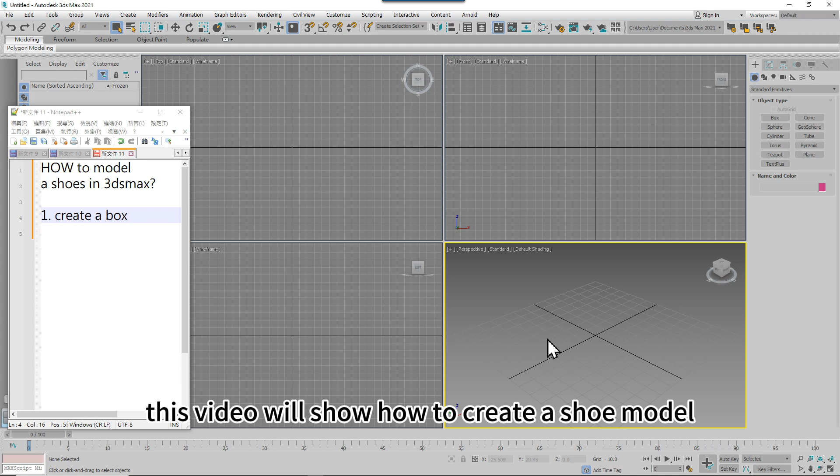This video will show how to create a shoe model in 3DSMAX.

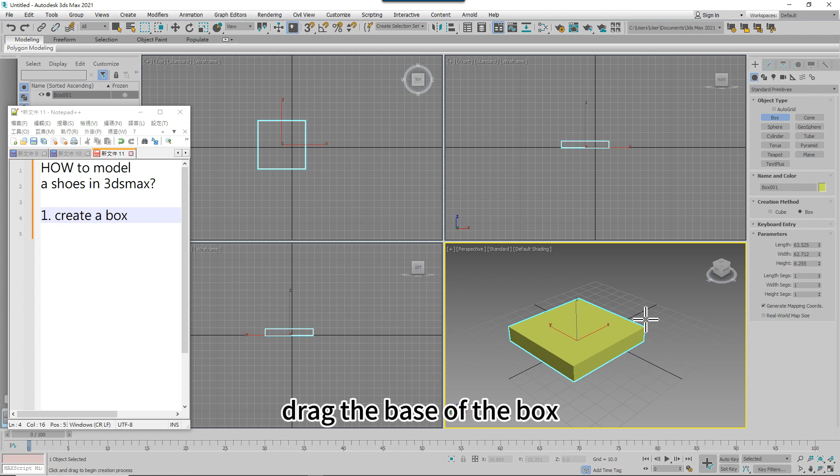Now we need to build a box first. Drag the base of the box, then move your mouse upward, then click to decide the height.

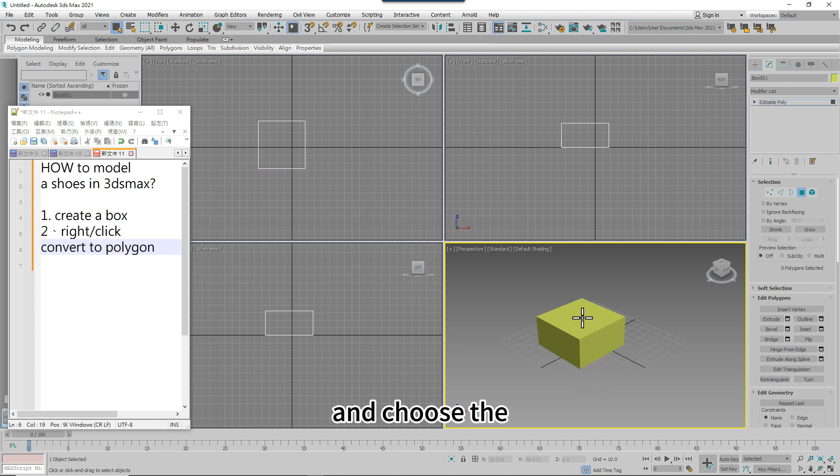Then right-click to choose Convert to Polygon Model. And then we can click the polygon button and choose the top face of the box. Right-click the extrude command, not the words, but the little box, so we can adjust the height by dragging the amount.

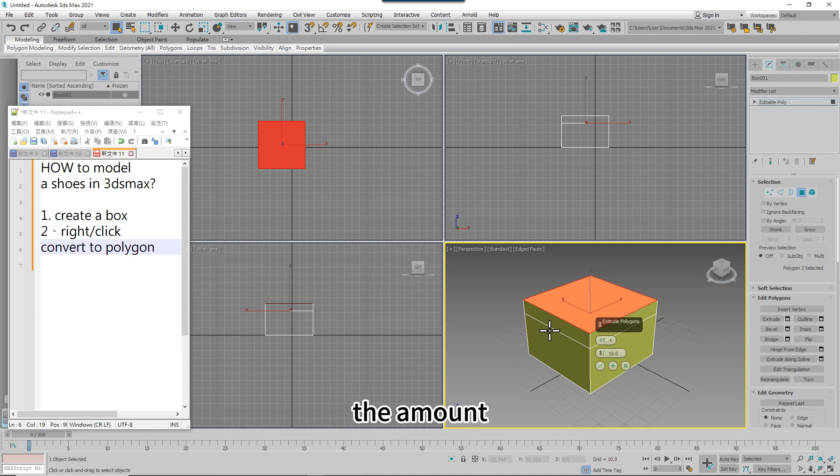Now we must click the F4 button to show the line between face and face. Then extrude the face in the other direction. We also click the extrude button, then adjust the amount you need.

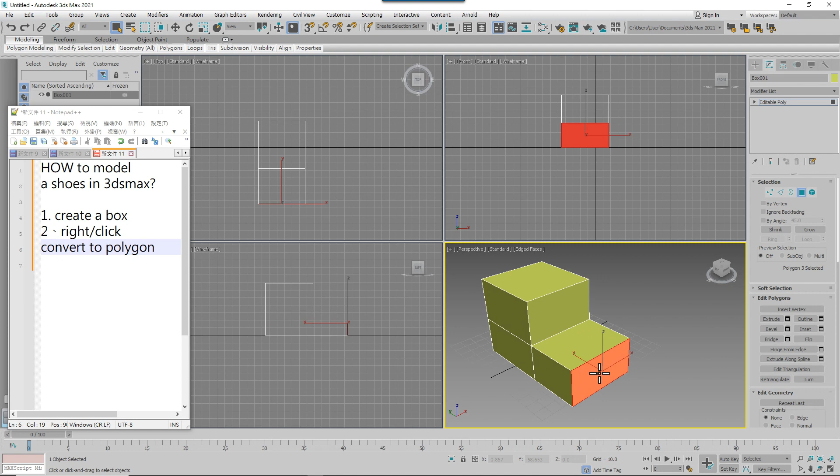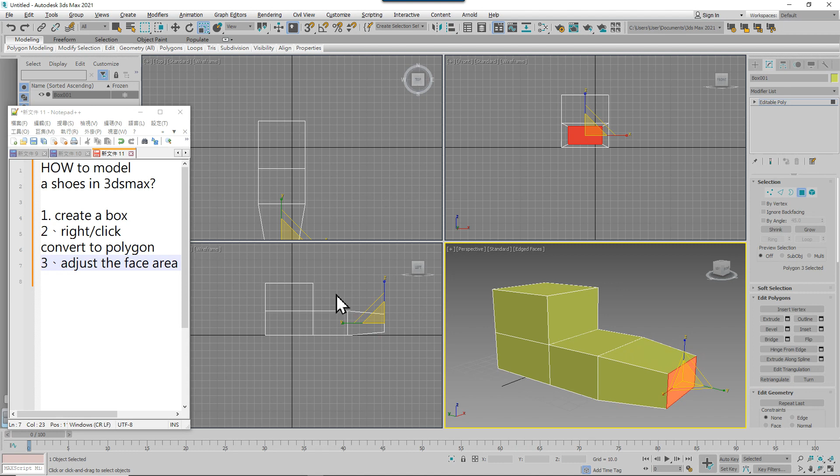Next step is the same method, we extrude the face again. We can choose the front of the shoe and use the scale button to adjust the area. You also can click the vertex button to adjust the detail of the shoe, using the move button or scale button.

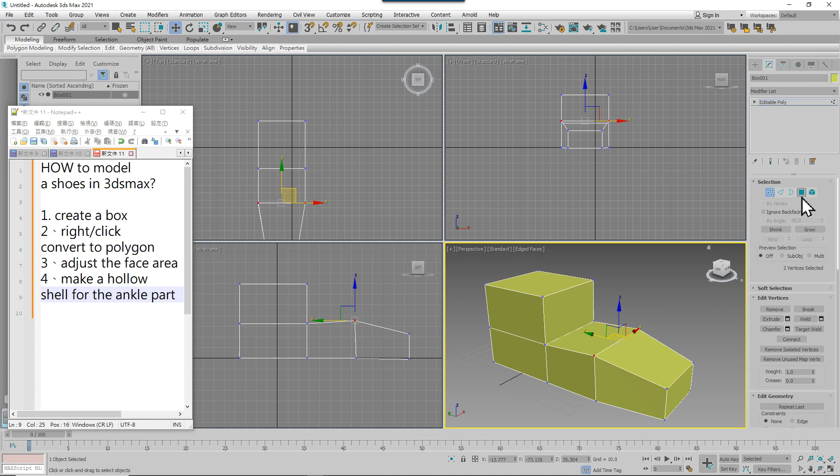The next step is to make a hollow shell for the ankle part. Then we choose the top face, right-click and choose the Inset command to adjust the inner area here.

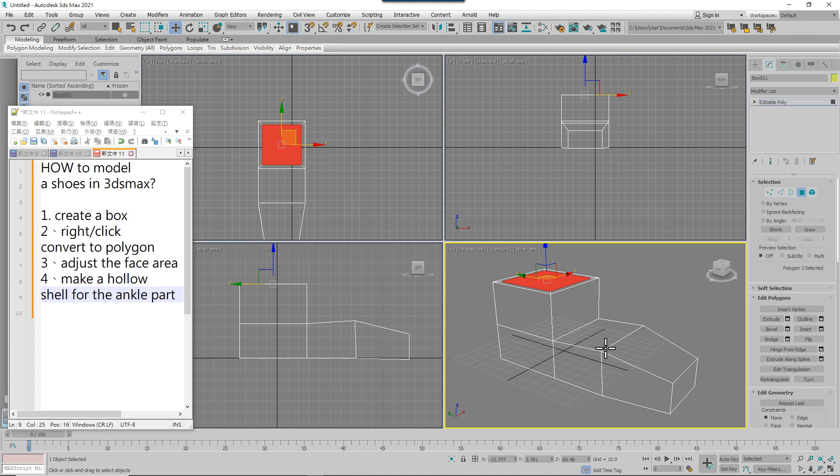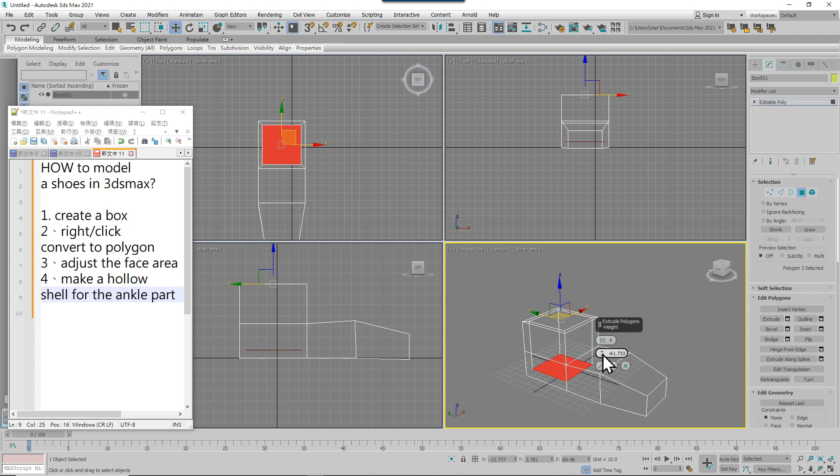Then we click the shortcut button to make the line construct visible. We'll make the top face extrude in the opposite direction. F3 makes all the lines visible, and F4 lets you watch the line between two faces.

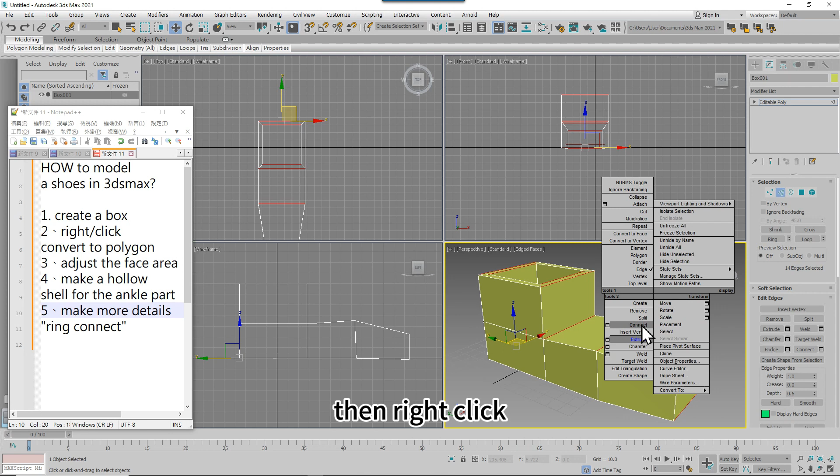Now we want to make more details, so we choose one edge and click the ring button, then right-click and choose the connect button. Now we can see the edge has been connected by an additional line.

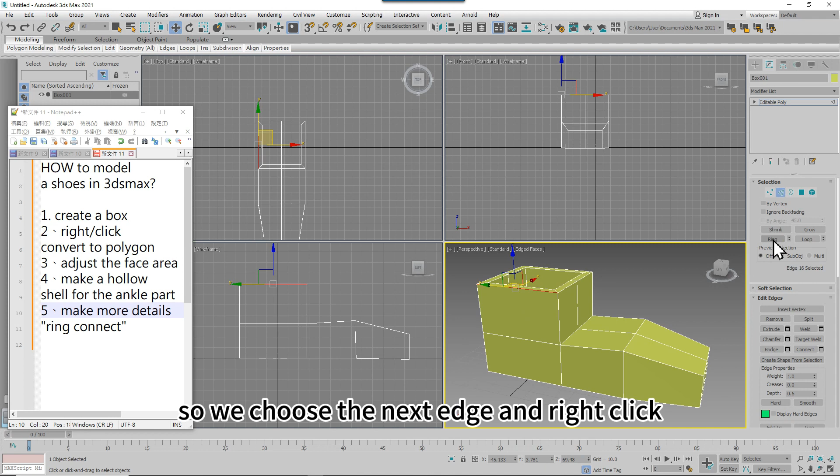The same job, we can make the other direction details. So we choose the next edge, right-click, choose the connect command again, and do the same job on the base area.

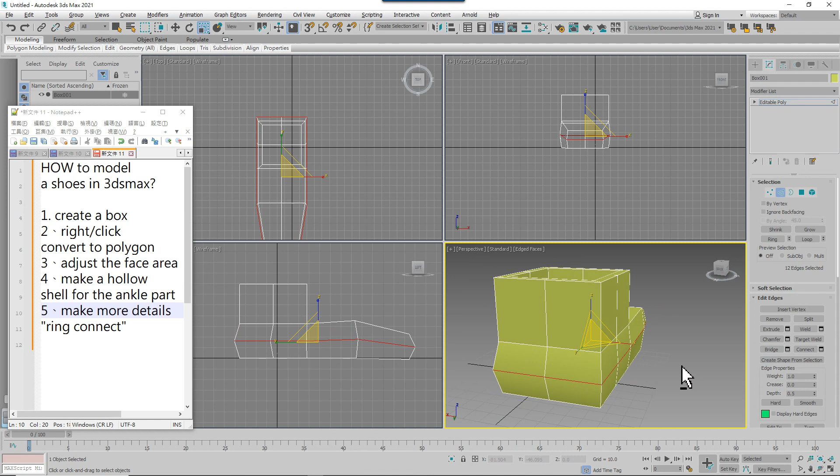And we click the scale button to change their shape. We always use scale and move buttons to make the shape better, so you need to repeat them several times.

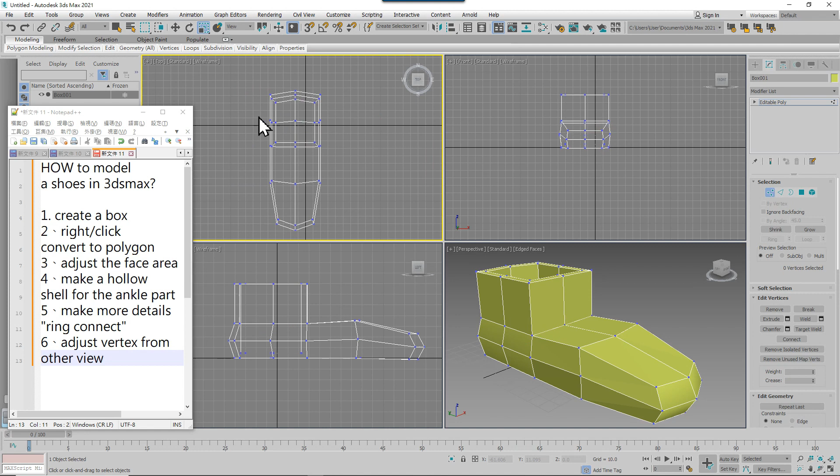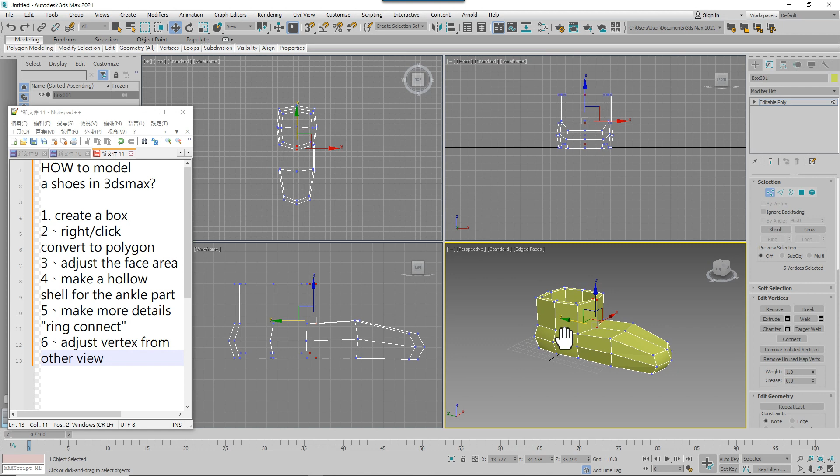The next step is to try to adjust the shape from another view. For example, you can adjust the vertex in top view. After you finish the adjustment, we can click vertex mode again to leave and exit the adjust mode.

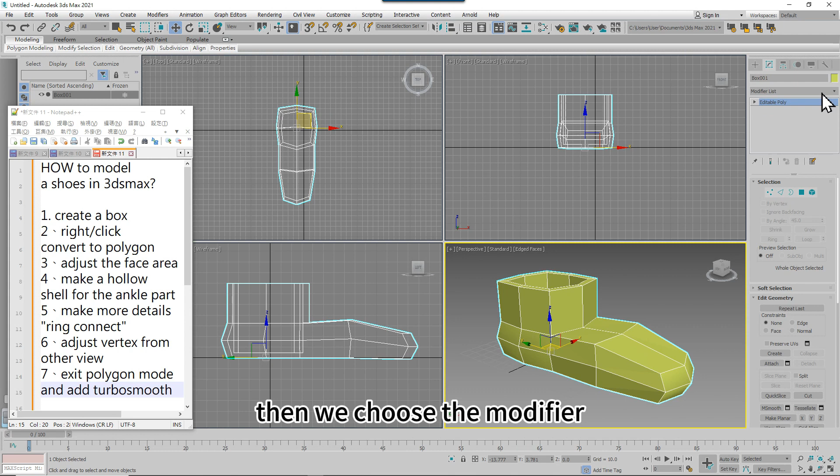Then we choose the modifier and find the Turbo Smooth method. Turbo Smooth. And now you can see the shape become softer.

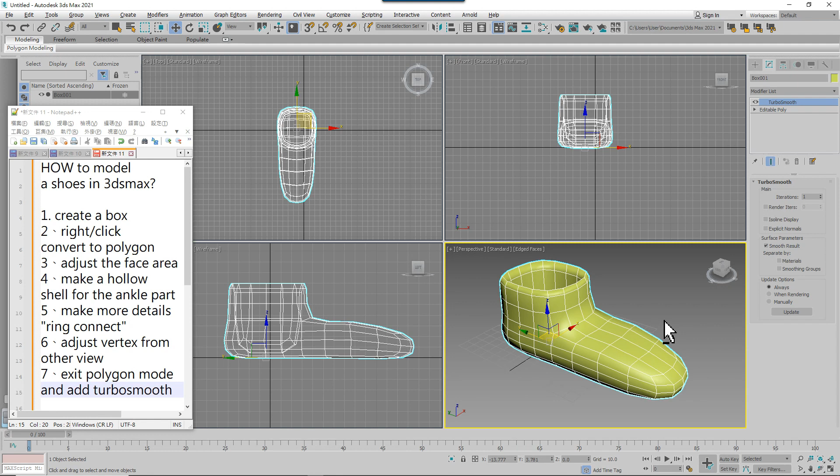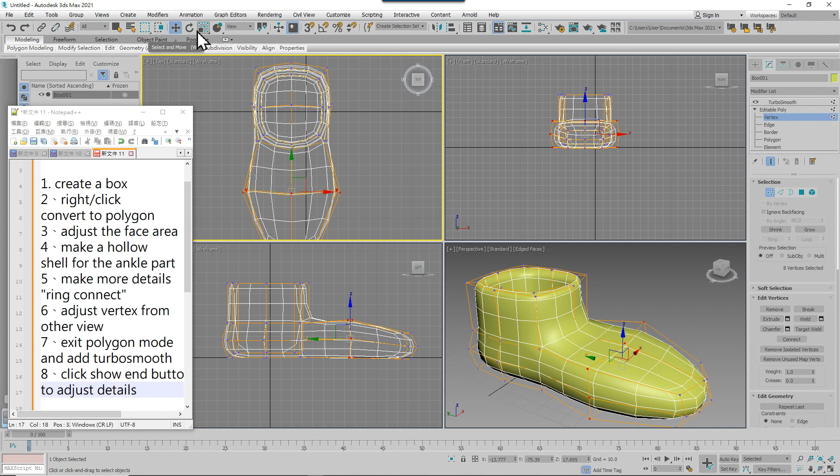If you want a better shape, you need to click the Show End button to adjust again. We also use Move and Scale buttons to adjust the vertex from different views.

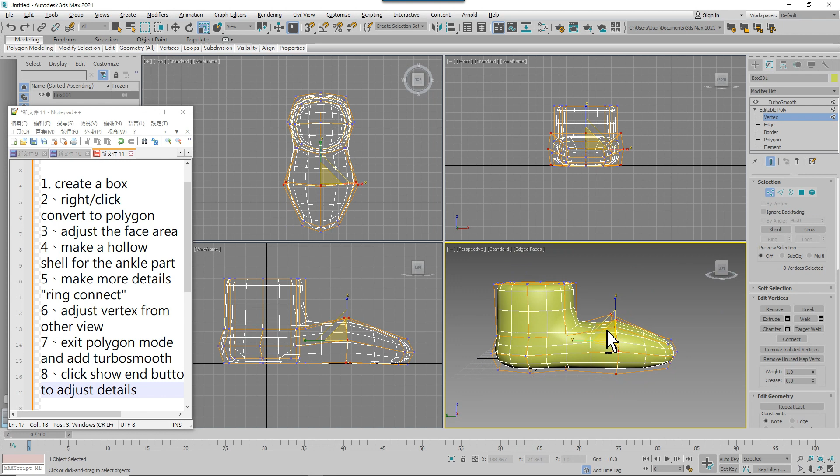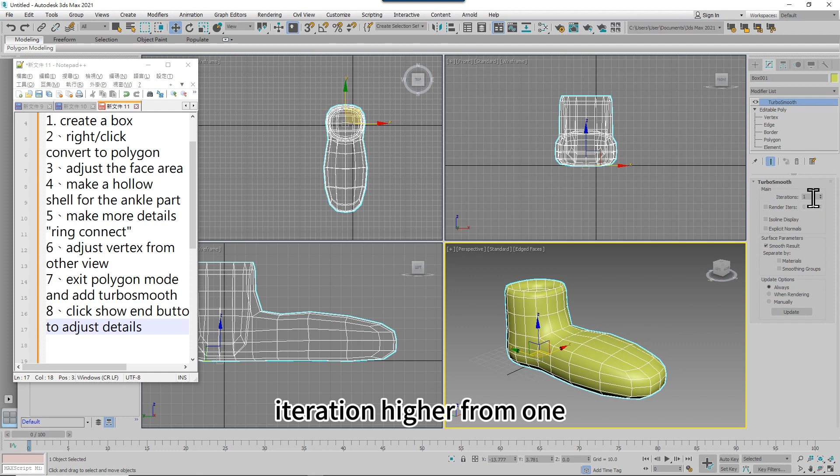If you want the shape to be softer, you could make the Turbo Smooth iteration higher, from 1 change to 2, and click ISO line display. Then make the line easily.

Now we get the shoe from 3DSMAX.